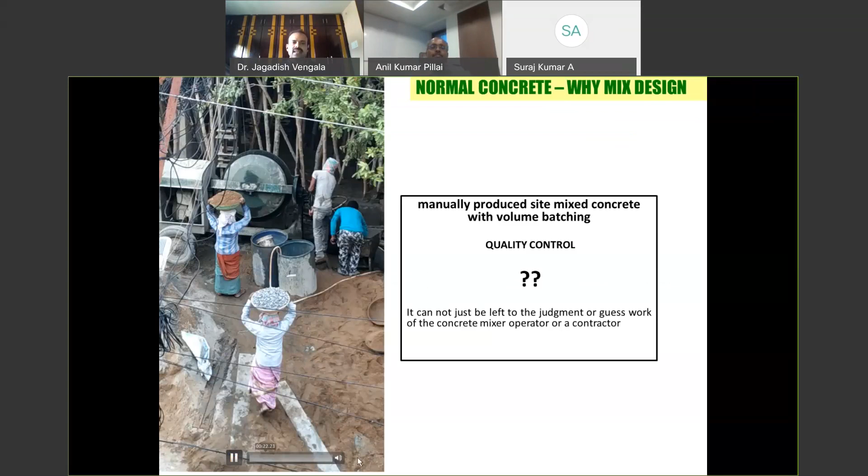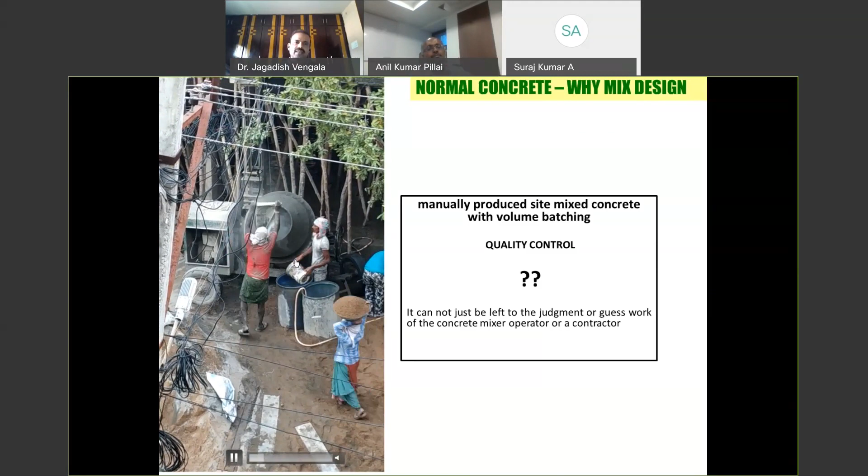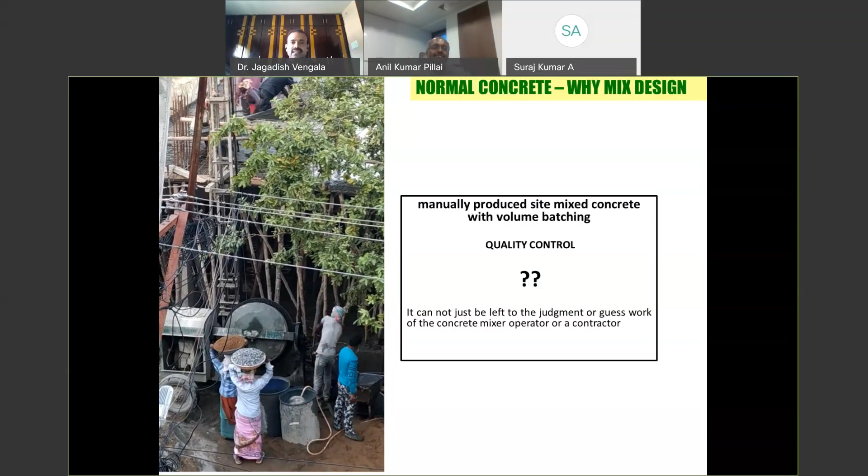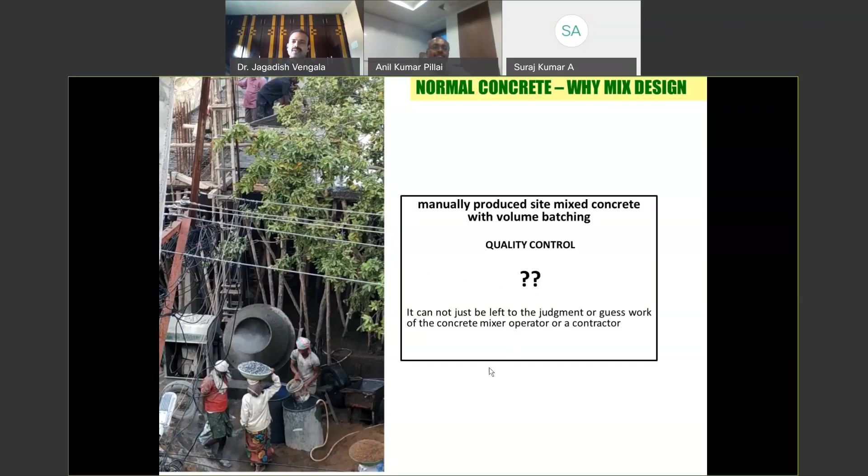I would like to play one video showing why we have to go for mix design. This is very important — I took this near my house, where they are mixing concrete. This is a general site, what you see near any building construction. People are putting whatever amount, approximately whatever the mix operator says. This mix operator put some water, then went somewhere and is just coming back. Meanwhile, a lady is putting coarse aggregate and a boy is putting water again. One strange thing I want to mention: as soon as she puts in the coarse aggregate, the boy immediately turns on the mixer and places the concrete. This is the kind of quality control we often foresee in many small construction sites, because if the quality control engineer isn't taking care, these are the things that happen.

What happens when you do volume batching? You simply place it and do it — there's no mix design, just putting it in. You end up with a lot of complications, because any specific variable changed in the concrete can adversely affect certain desired properties. This is what happens.

What is our aim in concrete mix proportioning? You have to optimize different conflicting requirements — satisfy workability, strength, durability, and cost at the same time — and apply sound technical principles governing different mix proportioning procedures. All these procedures are just guidelines.

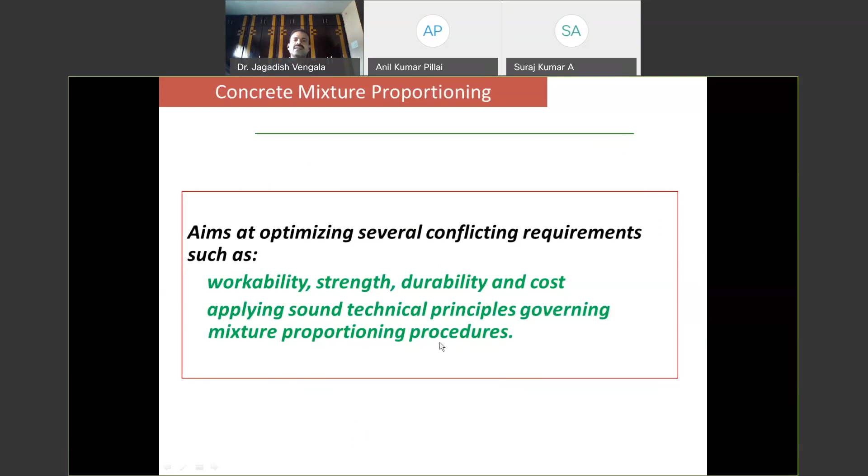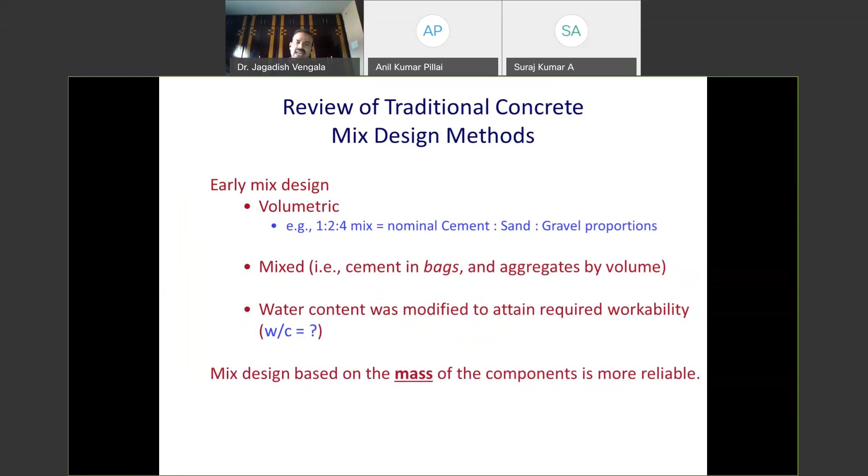As I mentioned, in volume batching many people go for a 1:2:4 ratio — it's a traditional kind of mix design, where water content is modified to get the workability. But most of the time you actually have to do it based on mass. Why? I'll tell you — there's a small but very interesting piece of work on the difference between volume batching and weight batching. You can see here a 20 mm maximum size aggregate, approximately 19 mm aggregate.

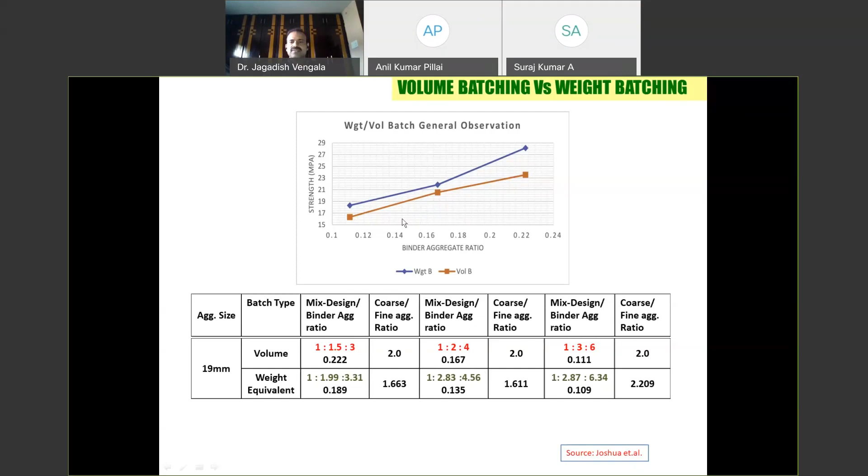See, volume batching, different mixes: 1:1.5:3, 1:2:4, 1:3:6, what we are talking about. Suppose you convert that into weight equivalents, you can see the difference in strength between weight batching and volume batching. You always end up getting more strength with weight batching. This is a good example where all the volume batching mixes give you a binder to aggregate ratio that is more, and then with weight batching you end up getting a good result. That is the importance of weight batching. Just wanted to give some example.

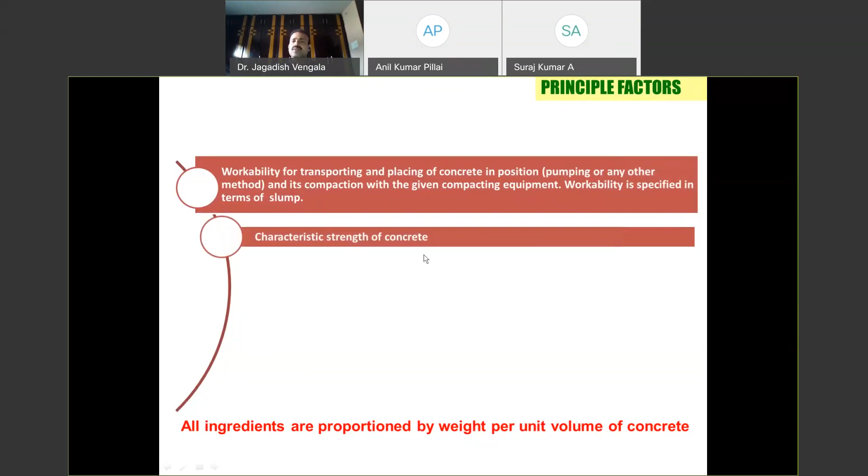What are the principal factors that govern any concrete mix design? The first is workability. Once you make the concrete, you have to properly transport and place the concrete in position, and you have to maintain the workability till then. You measure the workability using the regular slump cone method. Strength of the concrete is also one of the principal governing factors in designing the mix.

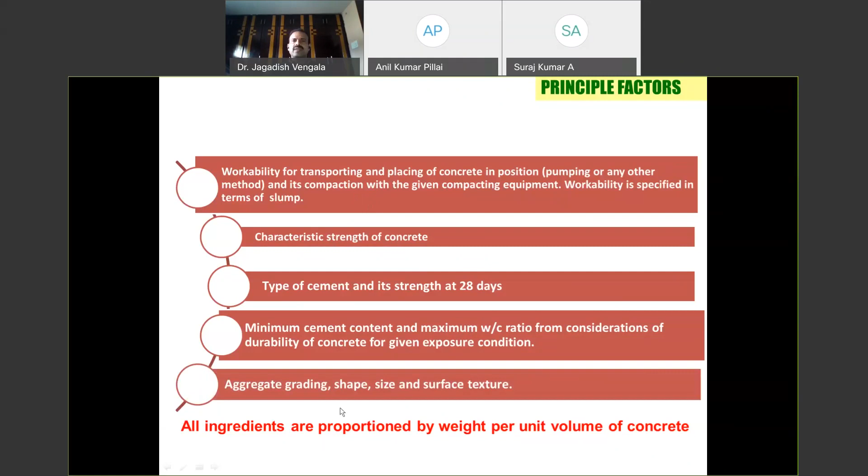What type of cement you are using and what is the strength in 28 days is also important. IS 456 gives you the minimum cement content and maximum water cement ratio you have to use, based on durability considerations. So exposure conditions are very important, starting from mild, moderate, severe to very severe and extreme conditions. IS has given quite good guidelines. But all ingredients, whatever you proportion, you have to go by weight per unit volume of the concrete. Also aggregate grading, shape, size, and surface texture is important. These are the principal factors governing mix design.

What are the objectives of concrete mix design? One, it has to meet the strength requirements and fulfill the durability requirements, wherever the structure is in that particular environment, and it can be mixed, transported, and compacted without any problem. At the end of placing, you should have satisfactory appearance to the mix, and as far as possible it should be economical.

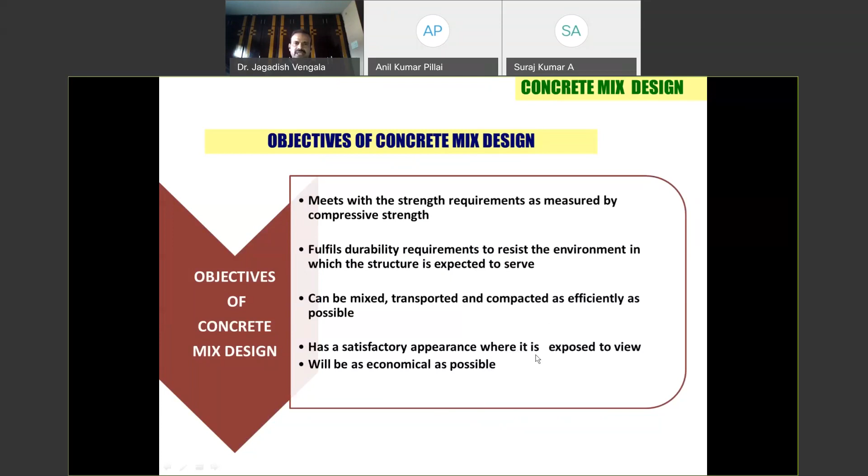So how do you go ahead with the concrete mix design? First, we follow some guidelines based on past experience, published data, information obtained from properties. We conduct small scale trials in the laboratory and testing, and then we also conduct full scale trials before construction begins at the site. Then we go ahead with the actual concreting.

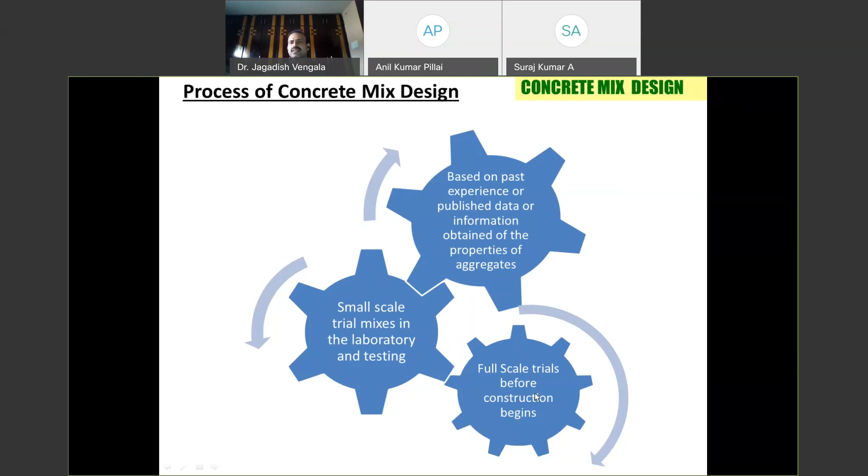If a particular normal weather condition, for a small structure, if some elements like columns and beams are going for M20 grade of concrete, say that is mild condition, particularly if it is RCC, you cannot go for M20 grade for the same weather condition for footings, because footings come under a condition where they are buried under aggressive soil. So you have to consider that as moderate exposure.

When I was doing this, last 20 years back, there was always confusion among contractors. We strictly recommend that whatever the normal weather may be, one has to go for moderate exposure for footings. So the minimum grade of concrete for it is M25 grade. That is why a lot of importance is given to the exposure condition.

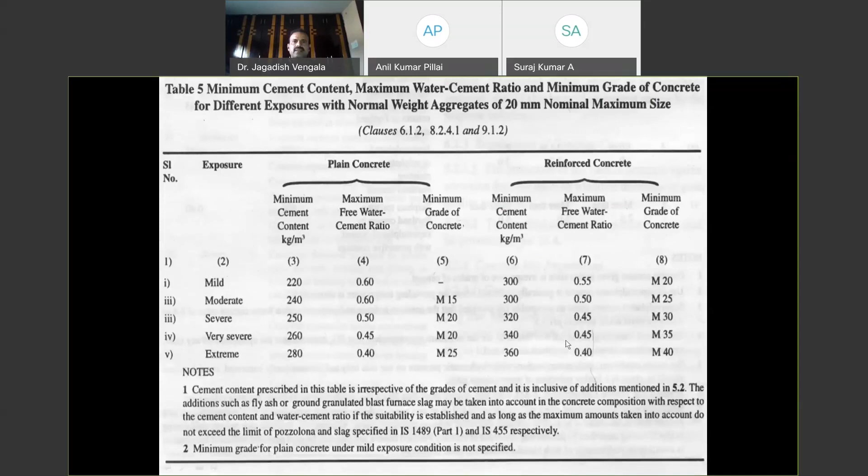So when you look into this table, for RCC, cement content starts with 300 kg per cubic meter of concrete up to 450 kg per cubic meter, and the maximum water cement ratio for RCC starts at 0.55. The grade of concrete classification is now changed - ordinary, then standard concrete, and high strength concrete, because IS 10262:2019 has given different strengths of concrete, and Indian standard also permits you to use various mineral and chemical admixtures.

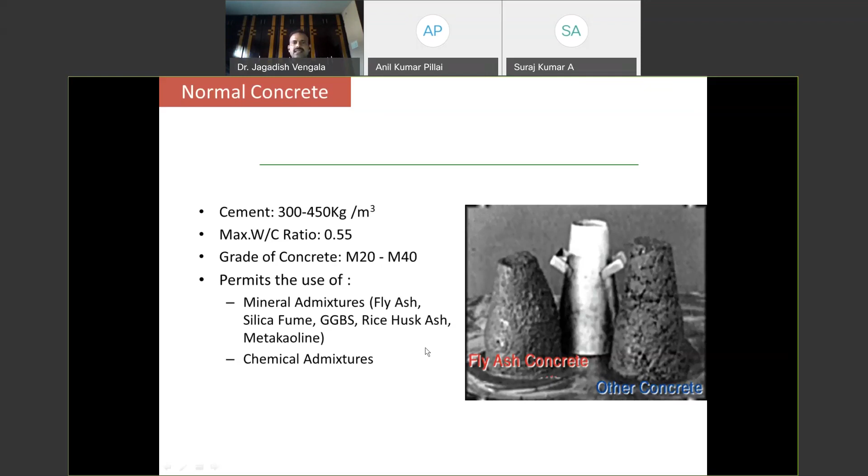When you want increased slump, you add a super plasticizer and get the required slump without changing the strength. Suppose the requirement is strength - you have not altered the slump, and the water-cement ratio is reduced, and you get the required strength by incorporating the super plasticizer.

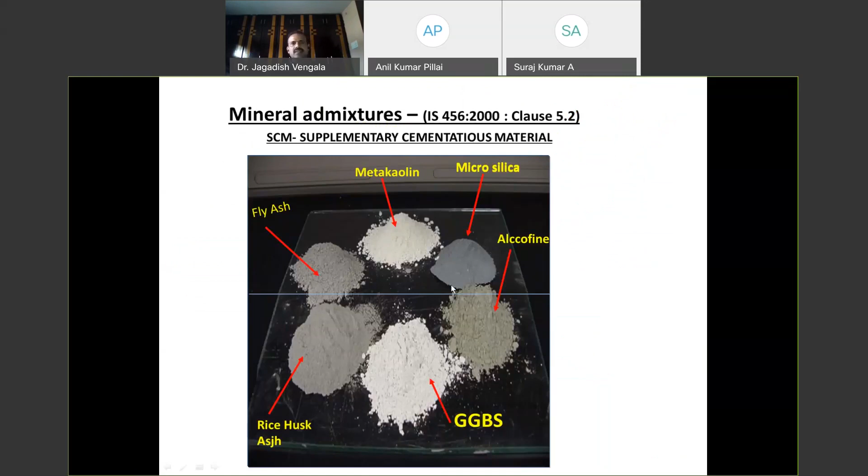The basic reaction, when you add water to cement, basic hydration happens and calcium silicate hydrates form. When you add supplementary cementitious materials like fly ash or GGBS, the excess calcium hydroxide reacts with these materials and forms additional CSH gels, which contributes to more strength, and the concrete becomes denser.

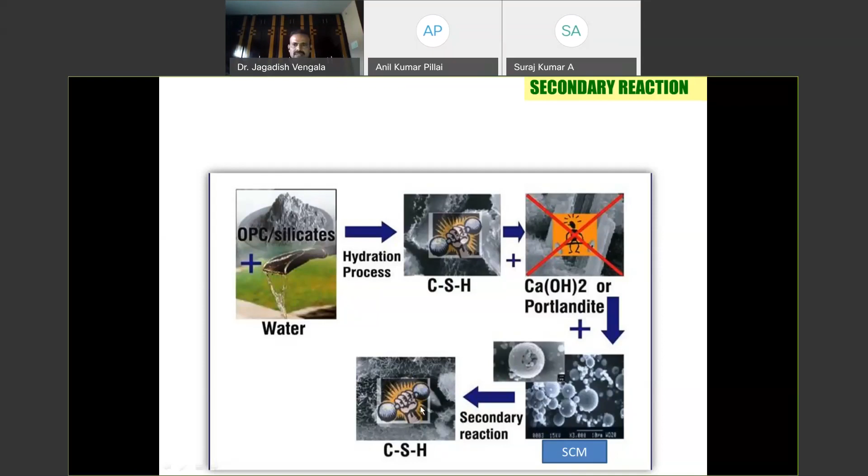That's the basic hydration process. When you add pozzolans, it improves the strength and at the same time increases the impermeability. Also, adding pozzolans reduces the bleed pockets because additional CSH gels form, and you get increased compressive and tensile strengths in concrete.

Particularly when looking at the aggregates used in concrete, this is very important. Earlier, jaw crusher aggregates were flaky and elongated in nature. Nowadays VSI crushers, vertical shaft impact crushers, have come, giving you nice angular cubical shaped aggregates.

You also have to look into the type of aggregate and where you are sourcing it. When we were doing mix designs with aggregates procured from Chennai and Tamil Nadu, we used to get specific gravity of 3.1, 3.2 sometimes, whereas regular aggregates are around 2.65, 2.67. So if you don't go for the mix design, you end up getting problems when you go for volume batching.

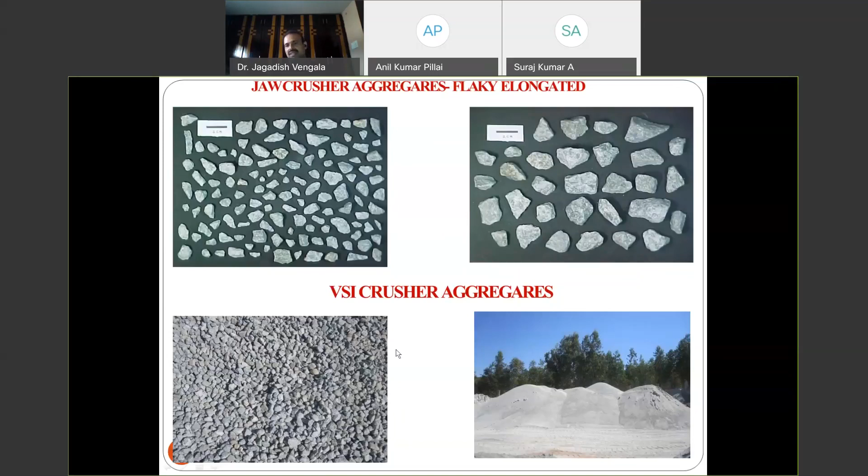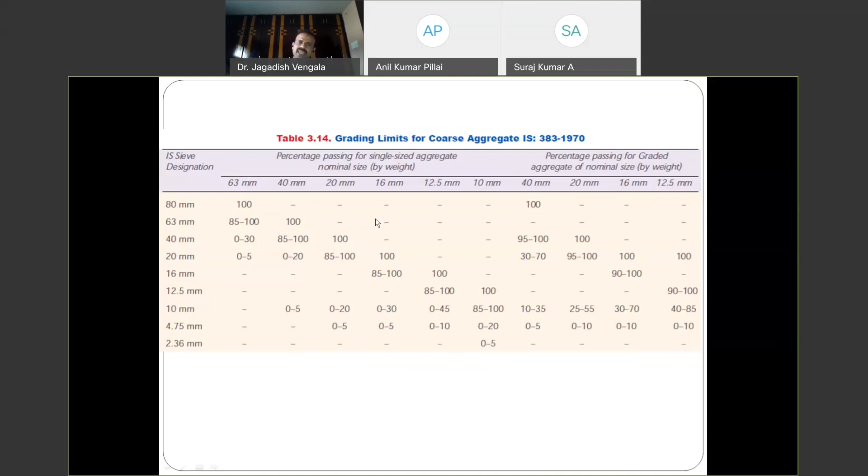It is very important to see that all the aggregates are graded in nature. Most of the time when you source both 20mm and 12.5mm down aggregates, these fall into single-sized aggregates. So most of the time, to make it a graded aggregate, we have to add different percentages - most common is 50-50, or sometimes depending on grading, 60-40, 40-60. We adopt this at various sites depending upon the aggregate properties.

It is very important whenever we do the mix design that we keep SSD condition, saturated surface dry condition. But at site, either the aggregates may be air dried or the aggregates may be wet. So you have to adopt moisture corrections, water absorption corrections. If it is air dry, if it is surface wet, or if it is completely saturated aggregates, you have to apply corrections for both cases - moisture correction and water absorption corrections.

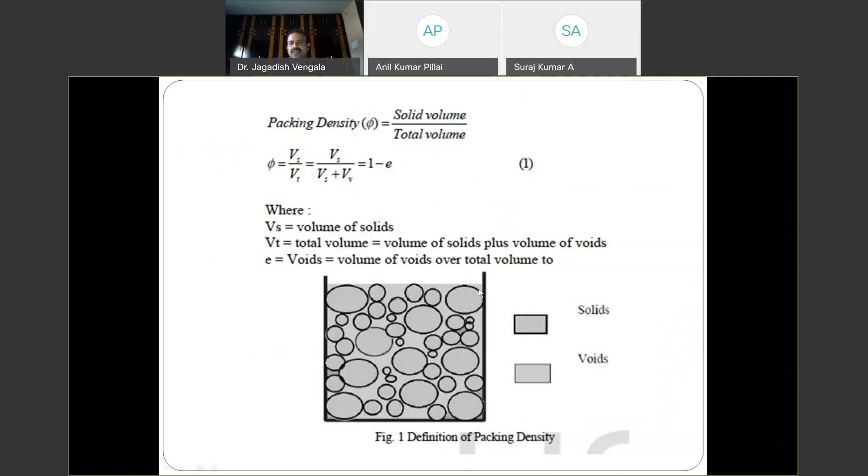This is what I'm talking about - the mix design basic concept is to have more packing density to reduce voids in the mix. So you can use this particular method to get the lowest void content.

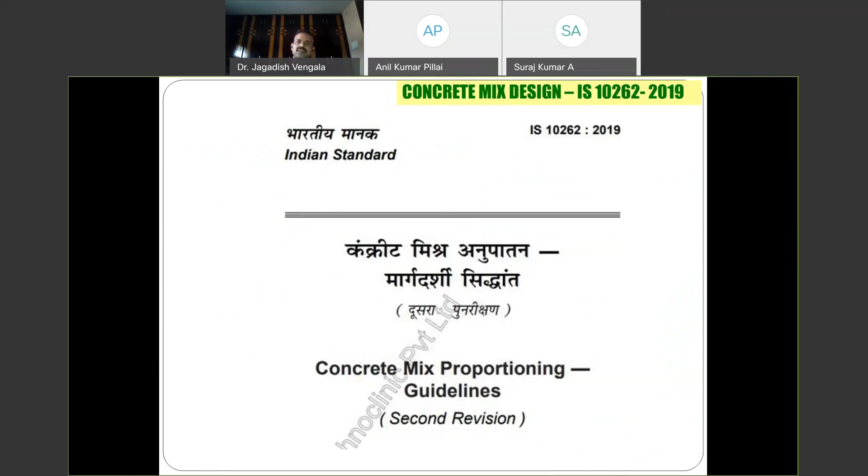Coming to the mix design, through an example I'm going to give you some insights into mix design - concrete mix proportioning, the new IS code 10262:2019.

Some of the highlights are, you can design different mixes. Ordinary concrete starts with M10 to M20, and standard grades are given between M25 to M55 grade. High strength concretes were mentioned in IS 10262, M60 to M100, and all sections are divided into general guidelines - ordinary and standard grades of concrete in the second section, high strength concrete given next, then self-compacting concrete in another section, and mass concrete in another section.

Somebody is saying the audio is not clear. I hope somebody can tell me if the audio is fine or not. It is clear, sir, it is clear. Thank you, it's very clear. Maybe at the attendee's end they would not be having the required bandwidth. Okay sir, thank you, we are able to hear you perfectly. Yeah sure, thank you sir.

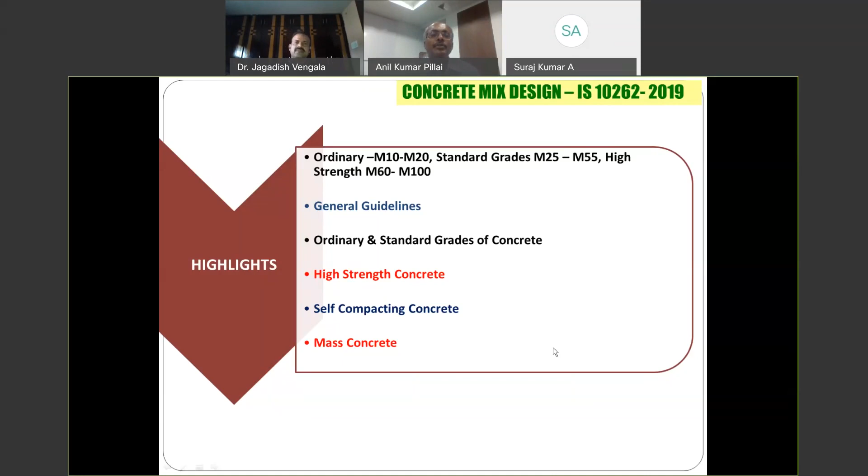Continuing - so when you go for the mix design, you look into the workability perspective. IS 456 has given different conditions, different slump requirements. You can see it is there - we all know that.

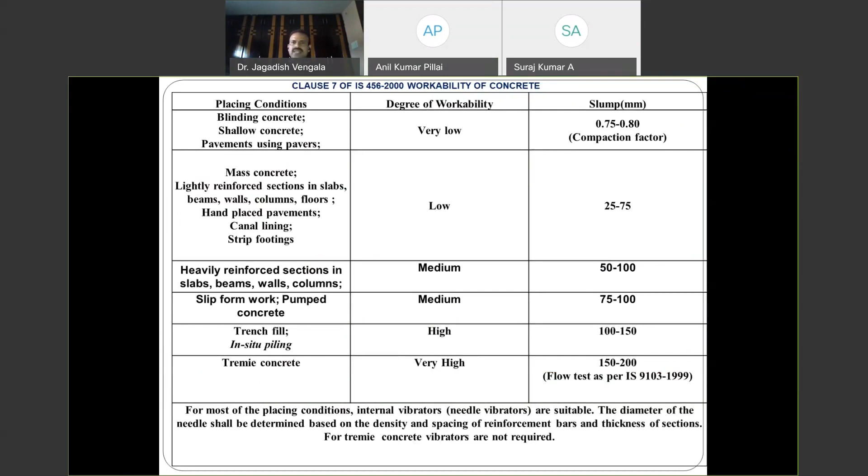Mixing is also very important. The minimum mixing time should be at least 2 minutes minimum. So people have to follow it.

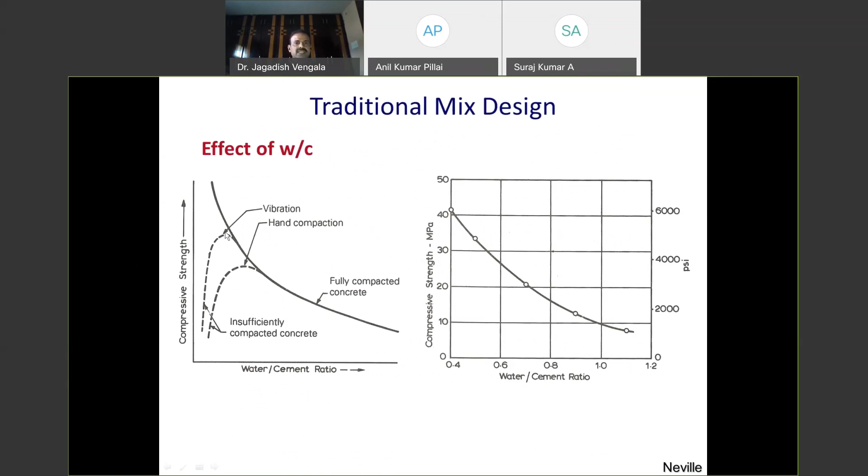And very important, one is water cement ratio to compressive strength. We all know the Abrams' law, but if you don't compact properly, you can see the relation between water cement ratio to compressive strength. If it is fully compacted concrete, how the compressive strength is, if hand compaction happens, how it is, and vibration - there are limitations for the traditional methods.

That is why you have to go for the mix design. So let me get into the example. Through this example, I'm going to explain each step.

So these are the details. M40 you've taken, OPC 43 grade. It conforms to IS 269. Fly ash is taken as admixture, mineral admixture, 20 mm.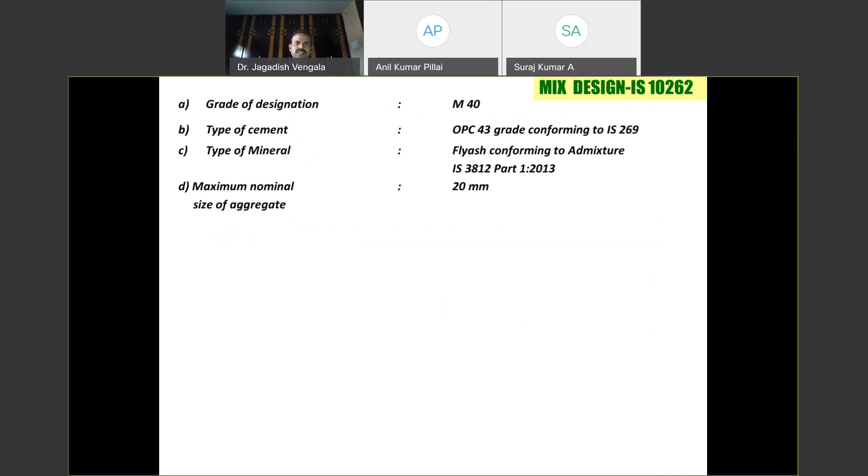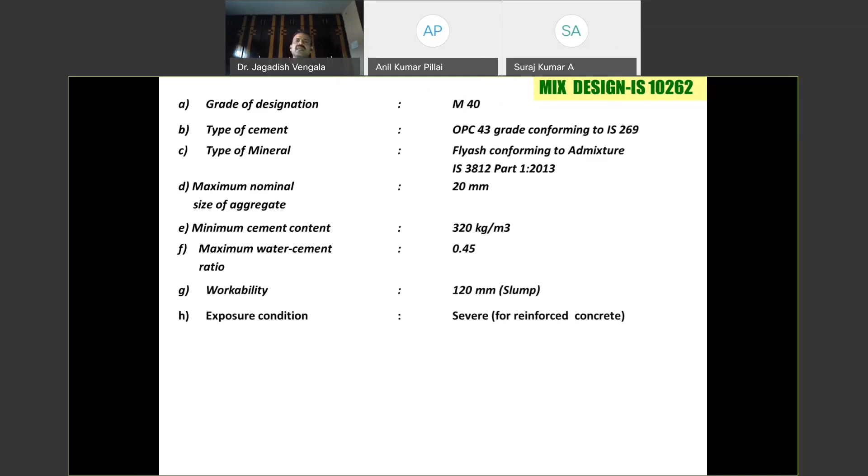And minimum cement requirements, these are the stipulated requirements given. Maximum water cement ratio is 0.45 because the condition is severe exposure condition. Workability requirement is 120 mm, that is slump, and you have to pump the concrete. And degree of supervision is good, and aggregate is crushed angular.

And maximum cement content - we all know that IS limits maximum cement content only, not cementitious content - cement content is 450 kg per cubic meter.

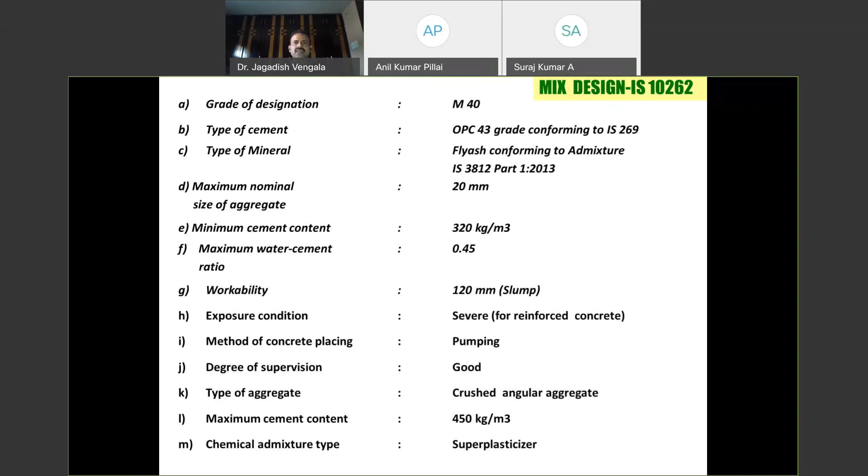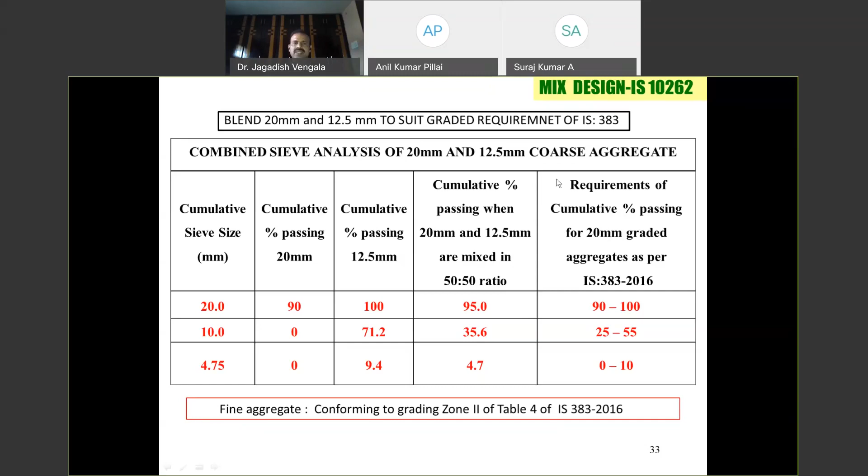So what you have to do is you have to blend both 20 and 12.5 to suit the graded requirements. And fine aggregate is conforming to zone 2.

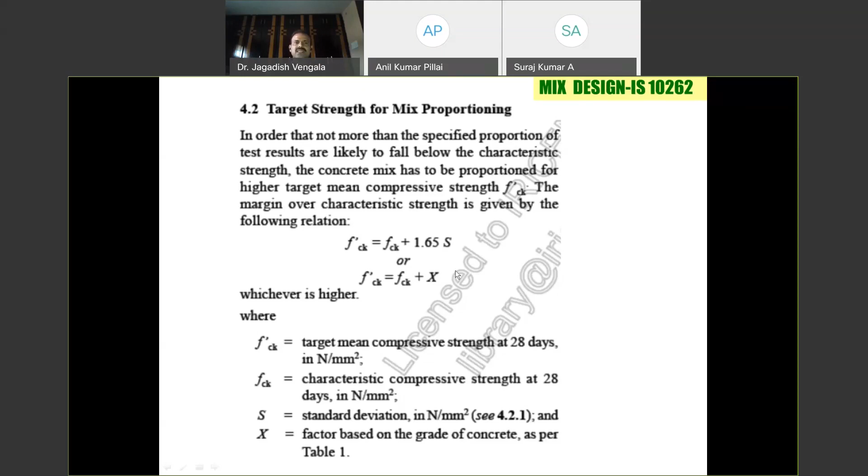So there is a little change in target strength formula when compared with the old code. Here they have given FCK plus 1.65 into S, that is the normal one. And then they've also given FCK plus X. This X factor is given based on the grade of concrete, or otherwise you can take the standard deviation. So there are two types of formulas given - whichever is higher you have to adopt.

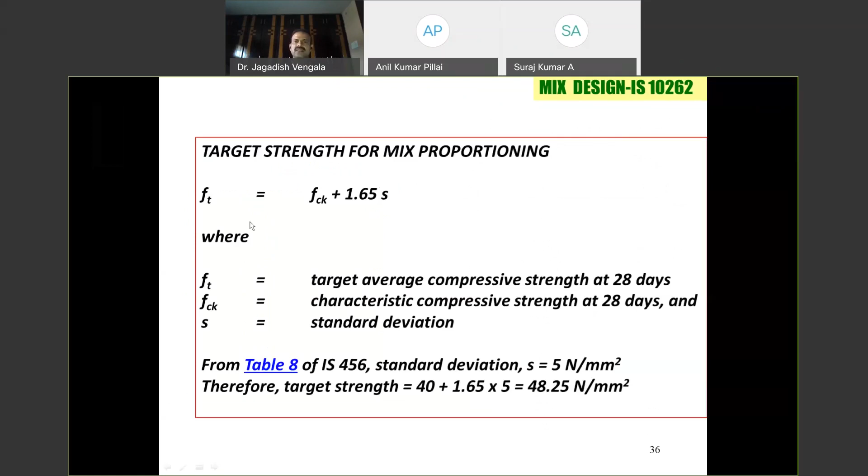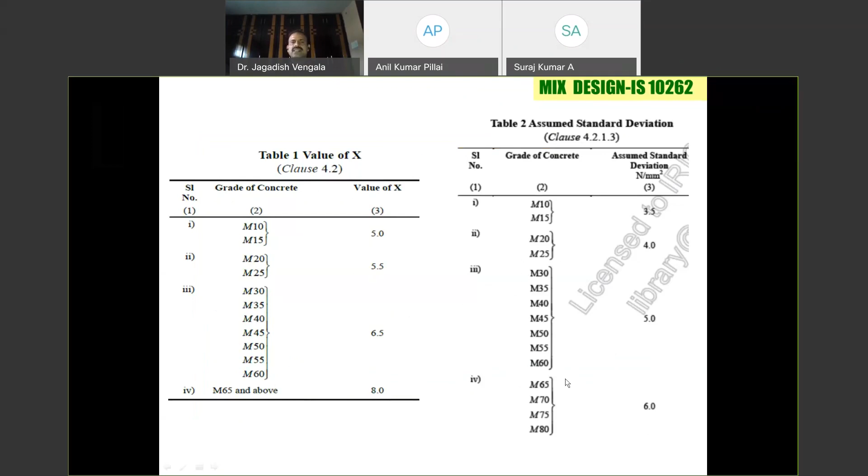So let us go step by step. First thing, standard deviation we have taken as 5 because it is M40 grade of concrete, and 40 plus 1.65 into 5, that is the target strength - you get 48.25.

And when you look into the exposure condition, the maximum water cement ratio is 0.45 as per durability requirement. So 0.36 is less than 0.45, hence it is okay. You can go with the required selected water cement ratio.

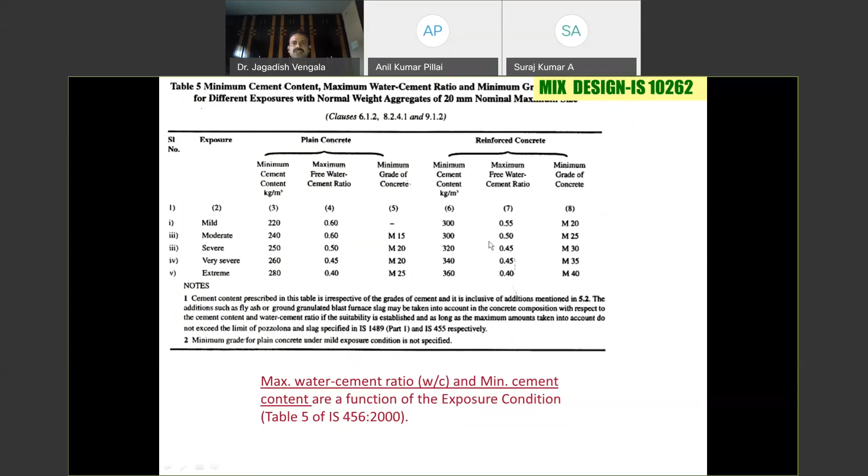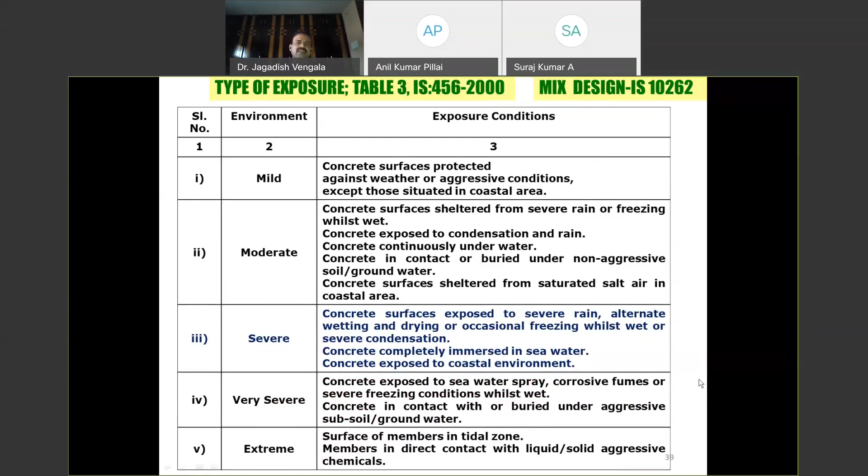I wanted to give you a refresh about the exposure condition, severe. The structure is either exposed to severe rain, or it is completely immersed in seawater, or it is simply in a coastal environment like Chennai, Mangalore, or Visakhapatnam.

Next step is selection of water content, based on the water content table. For 20 mm, it is 186. When the nominal maximum aggregate size is less, say 10 mm, the water content requirement is more because you have more surface area in coarse aggregates. If it's 40 mm maximum coarse aggregate, the surface area becomes less, so you need less water. We have taken 186 because the maximum coarse aggregate size is 20 mm.

Slump requirement is 25 to 50 mm slump, for which this 186 liters is given. For every 25 mm slump, you have to go for an additional 3% of water. In case of 120 mm slump, you make that correction. Also, since it is pumpable, you have to reduce coarse aggregate by 10% - I'll come to that later. As far as water is concerned, because the slump is 120, you have to additionally add 3% for every 25 mm.

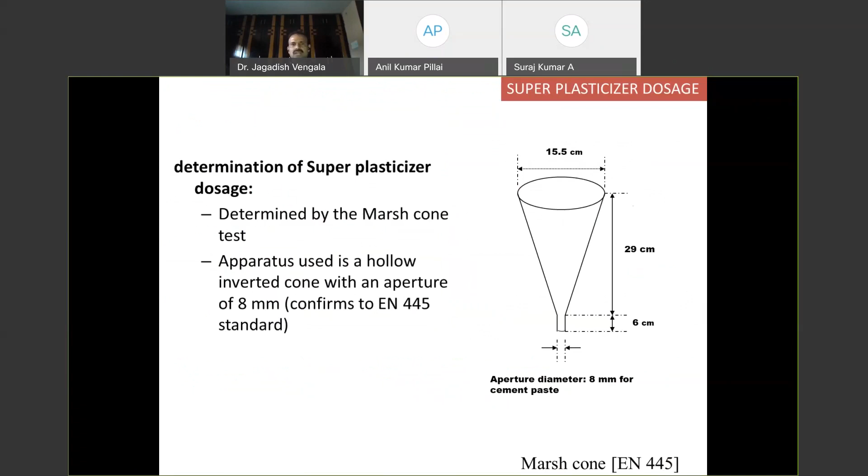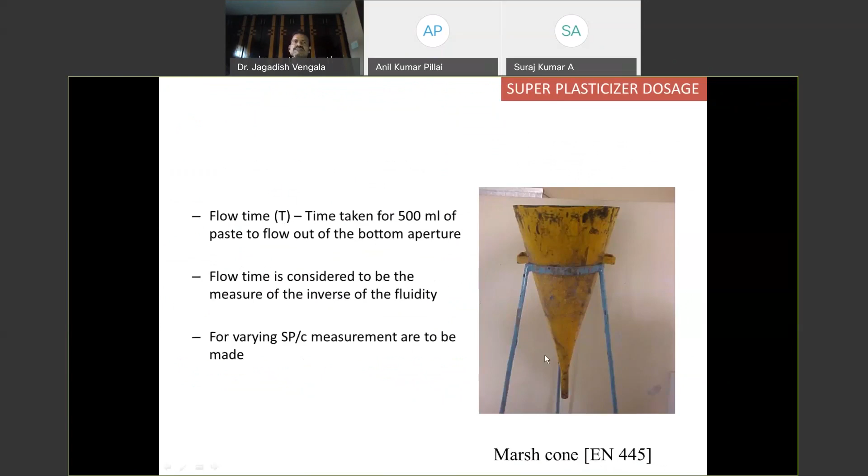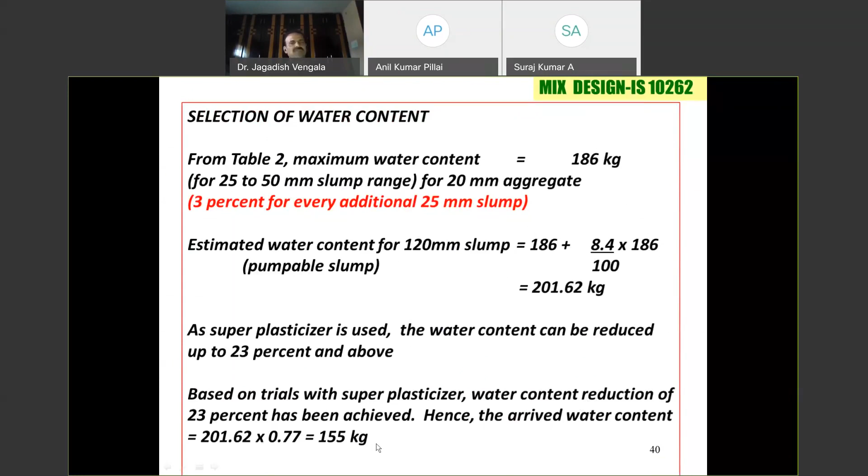Superplasticizer dosage and compatibility between cement and superplasticizer can be taken from the marsh cone test. Coming back, once you add the required superplasticizer dosage based on trials, the water content - this achieved a water content reduction of 23%. So the rest is 77% of the water, which is 155 kgs or liters of water.

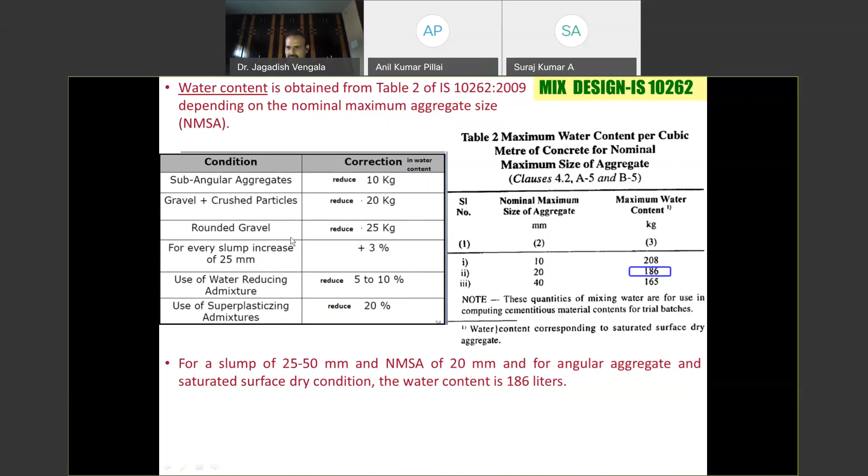Suppose you have different kinds of aggregates - if you have rounded coarse aggregate, you have to reduce the water content by 25 kgs, and if it's subangular aggregate, you reduce it by 10 kgs. You have to adopt depending upon the material property. Many times, once the source of material changes, people follow the same mix design given from the lab. You have to make corrections and fine tune the mix design, conduct a small trial at the site, and then go ahead.

Once you have the water-cement ratio and water content, water by cement equal to 0.36, you get the cement content - here it is 431 kgs. For severe condition durability requirement, per the table, the minimum cement content is 320 kgs. Since 430 is much higher than 320 kgs, the durability consideration is satisfied.

But keep in mind, if the coarse aggregate size changes - suppose you go for 10 mm down or 12 mm down - then you have to take minimum cement content as 320 plus 40, that is 360 kgs, as the minimum requirement for the 10 mm down size aggregate under severe condition. That means the minimum cement content has to be increased. The maximum cement content we all know is 450 kg per cubic meter; you should not go beyond that, because beyond it there is a risk of cracking.

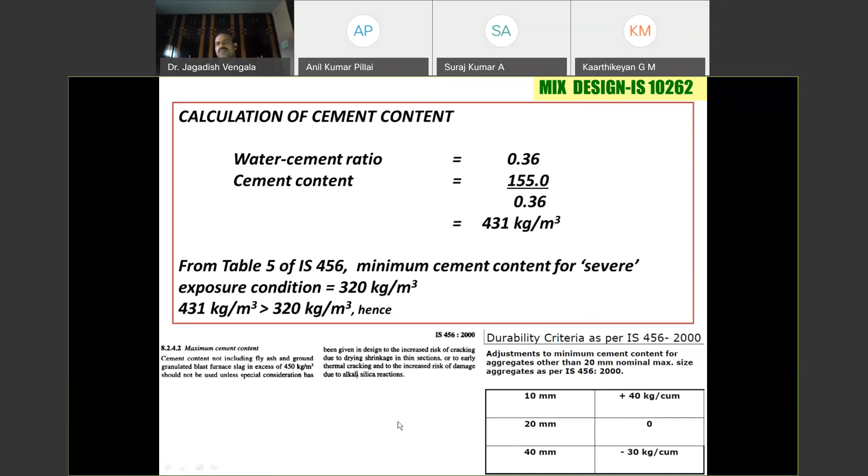Get the cementitious content, then you have to proportion the mix for the fly ash. How do you decide the percentage? You have to decide based on the project, because of whatever you have agreed with the contractor, the client, or the third party. And in certain situations, you have to increase the cementitious materials based on experience. So you have to adopt based on experience and trial, or based on the project.

But anyway, for high strength concrete, the limits are now given in IS 10262:2019. I will show you what the limits are. So it's a simple example. Suppose a 10% increase you have to do. Already 431 is your cementitious material, with a 10% increase, then it is 474.

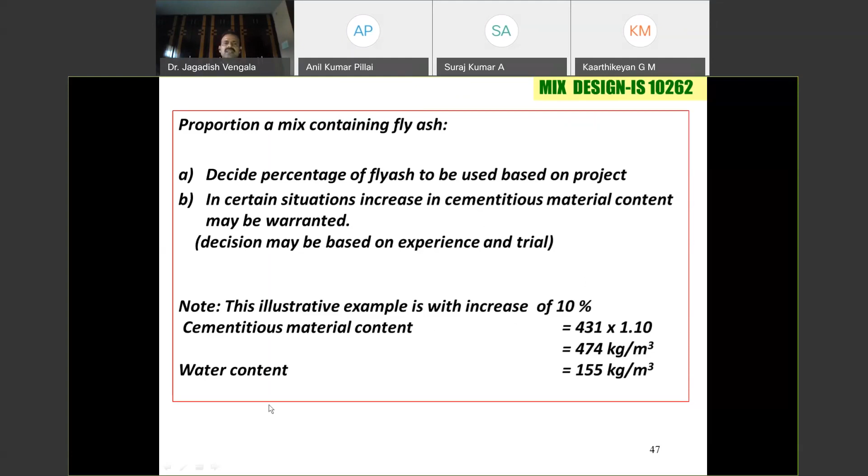Then what is the water content? 155 kg per cubic meter. So how much is your water cement ratio? 0.327. Okay. So once you get that, adopt fly ash for this particular mix at 30%. So 474 into 30%, you get 142 kgs as the fly ash, and you deduct 142 kgs from the cementitious content, and then you get the cement. So cement is 332 and your fly ash is 142.

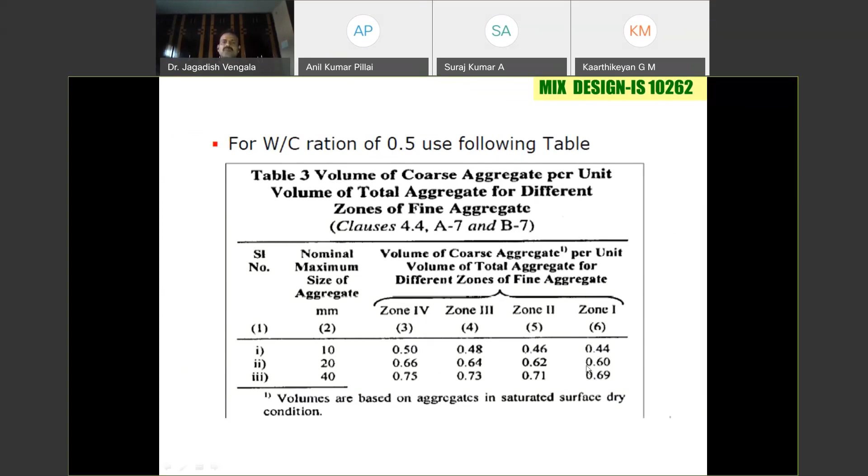So next, once you have your water, cement, and fly ash, you have to go for the coarse aggregate proportions. You know that for zone 1, 20 mm aggregate, it is 0.6. And when the zone increases, that means as the fine aggregate zone increases, your coarse aggregate volume increases. So here, because it is a 20 mm downsize and zone 2 sand, for water cement ratio 0.5, you can see it is 0.62. That's from the table. And in our present case, the water cement ratio is 0.327. So you have to adopt corrections.

It is very simple. If the water cement ratio changes, for every 0.05 increase, you have to reduce the volume by 0.01. If you are reducing the water cement ratio from 0.5 to below, here in this case 0.327, then for every 0.05 decrease, you have to increase the volume of coarse aggregate by 0.01. So here at 0.327, you get 0.62 for 0.5, right? So additionally you have to add, because the water cement ratio is reduced. So 0.0346, and the total volume of coarse aggregate ratio you get is 0.654.

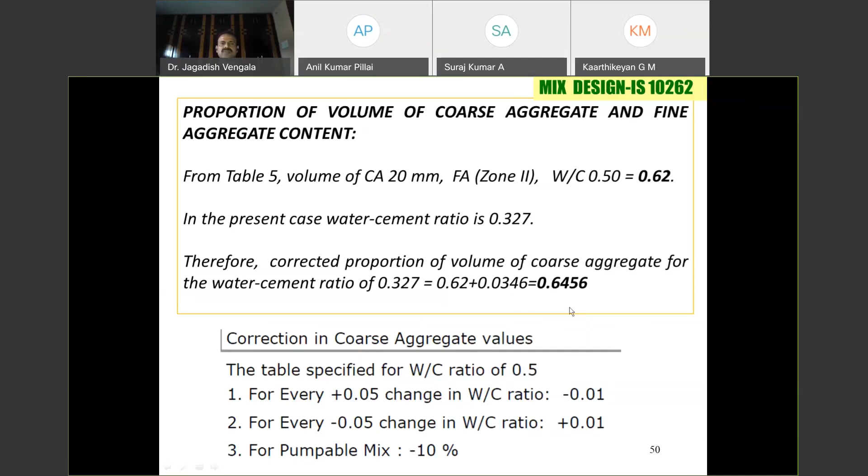So in this case, again, this is a pumpable mix. So for a pumpable mix, you have to reduce the coarse aggregate volume by 10% because you need more paste to push the aggregates while pumping. So that is the reason we have to reduce it by 10%. So the volume of coarse aggregate is 0.654 into 90%. That means 10% you are reducing. Finally, your volume of coarse aggregate is 0.59. So if you deduct from the total volume, it's 1 minus 0.59, which is 0.41.

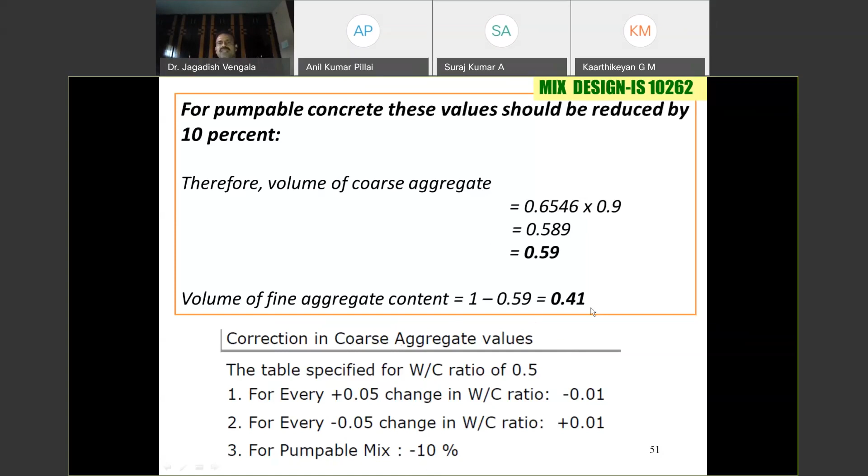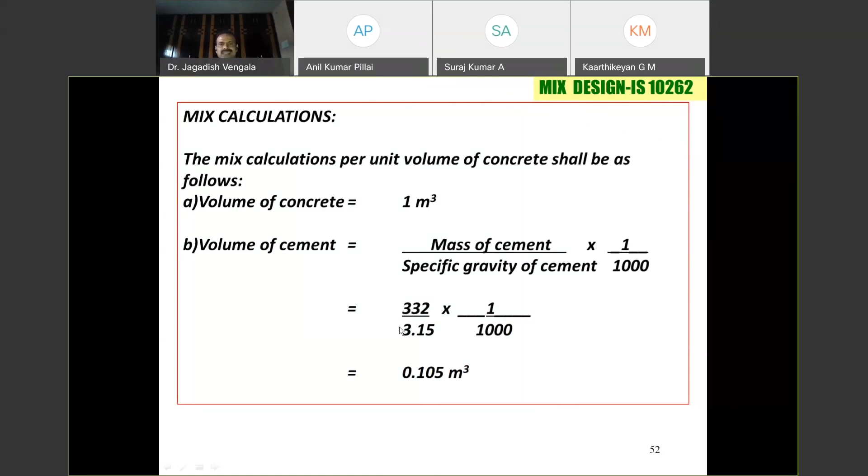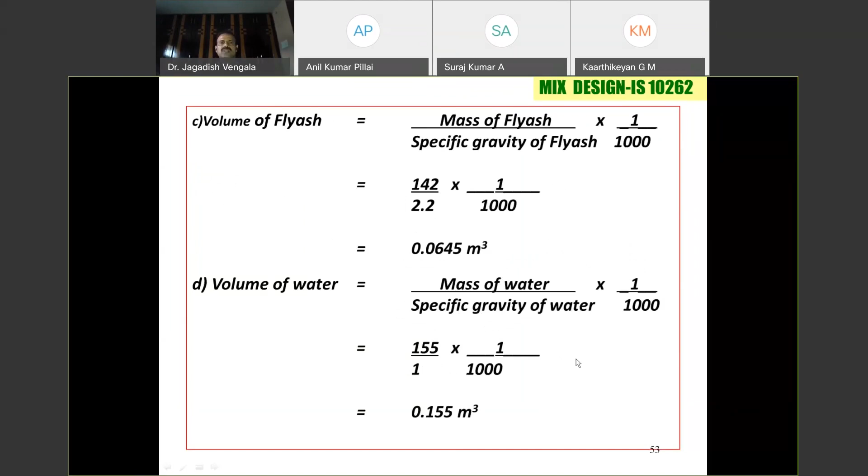So you know the basic calculation. You have to take the volume of concrete, 1 cubic meter you are doing, and the mass of cement, which you got as 332, divided by specific gravity into 1 by 1000, you get the volume of cement. And the specific gravity of fly ash in this case is 2.2, 142 is your fly ash, and then into 1 by 1000 you get the volume of fly ash. And water, 155, you get the water volume. And then you also have to calculate the volume of chemical admixture. Here in this case, we are using 1% by mass of cementitious material. The specific gravity of superplasticizer is 1.145. So you get 4.74 liters per cubic meter. You get the volume.

And then you have to deduct from the all-in volume. Here in this case, we have got the air content in IS 10262:2019. So for 20 mm, the air content you have to take is 1%. If it is 10 mm aggregate, it is 1.5. Here in our case it is 1%. So that means 1 minus 0.01 minus the rest of the cases. That means you have deducted the cement, fly ash, water, and superplasticizer. So you get the volume of all-in aggregates.

When you multiply with the specific gravity and the volume of coarse aggregate, you get the mass of coarse aggregate, and then you get the fine aggregate when you multiply with the remaining fine aggregate volume. So once you get the mixes, these are the final mixes you got: cement, fly ash, water, fine aggregate, coarse aggregate. This is for saturated surface dry conditions. So if you are at site and you have moisture or water absorption, you have to adapt that by checking the properties of the aggregates or materials.

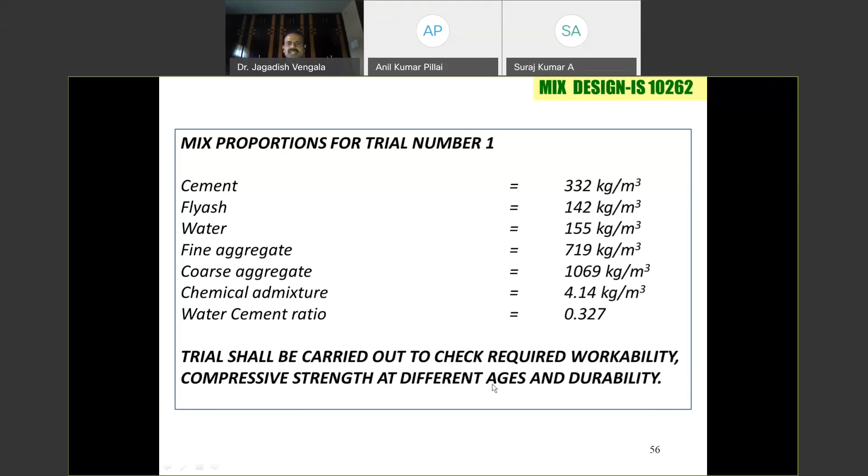So once you get the first trial, you have to carry out a number of trials and check the required workability, strength at different ages, and durability tests. For high strength concrete particularly, nowadays they are referring to durability tests also for tall structures. And here you can see two more. You have to conduct a number of trials with plus or minus 10% variation if you don't get the required strength.

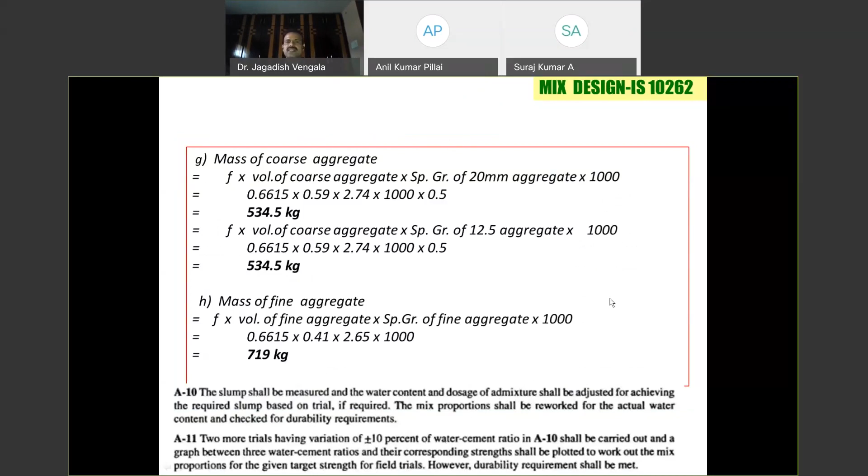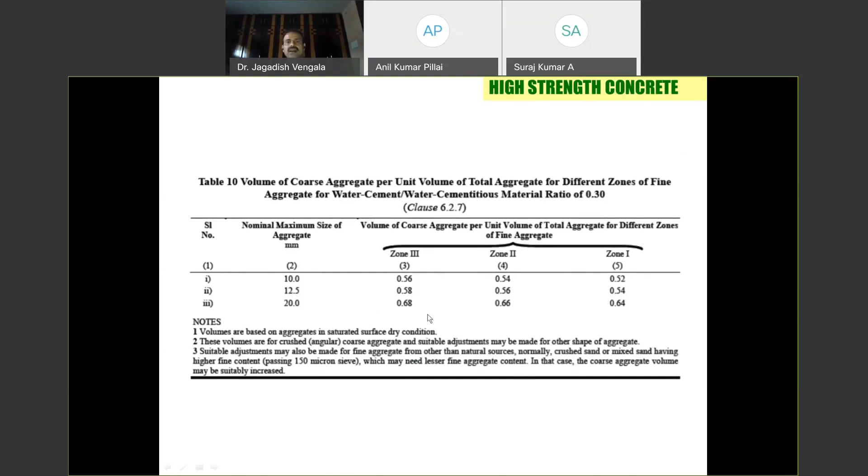Anyway, some points I would like to give you in case of high strength concrete. For nominal maximum size of aggregate, the volume of aggregate will be changing, particularly for high strength concrete.

For high strength concrete, the water cementitious material ratio is also given in the code book. For example, for 70 MPa with 20 mm down aggregate, the water cementitious material ratio you can adopt is 0.33. This is the recommended water cement ratio given in the new code for high strength concrete.

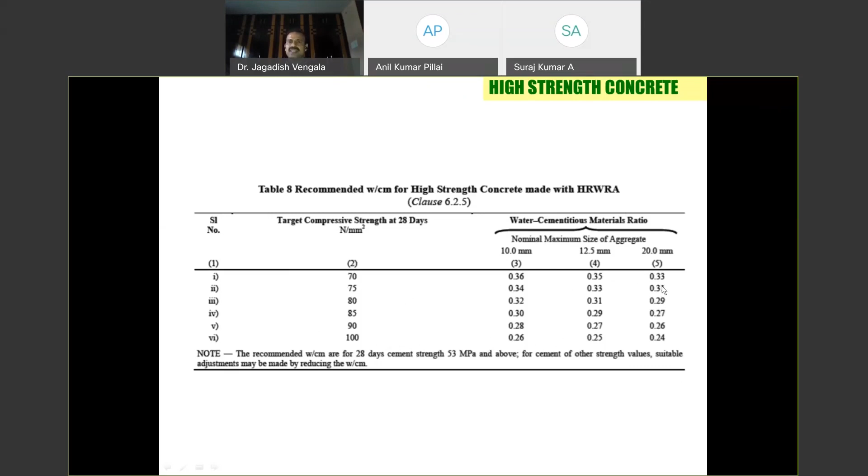Even the maximum water content is given based on the maximum size of the aggregates. For 20 mm it is 186, for 12.5 mm it is 195, and for 10 mm down it is 200. This is a little different when compared to IS 456, where water content is given for 10, 20, and 40 mm. But when going for high strength concrete, you use either 12, 12.5, 20 or 10 mm, and these are the maximum water content limits given.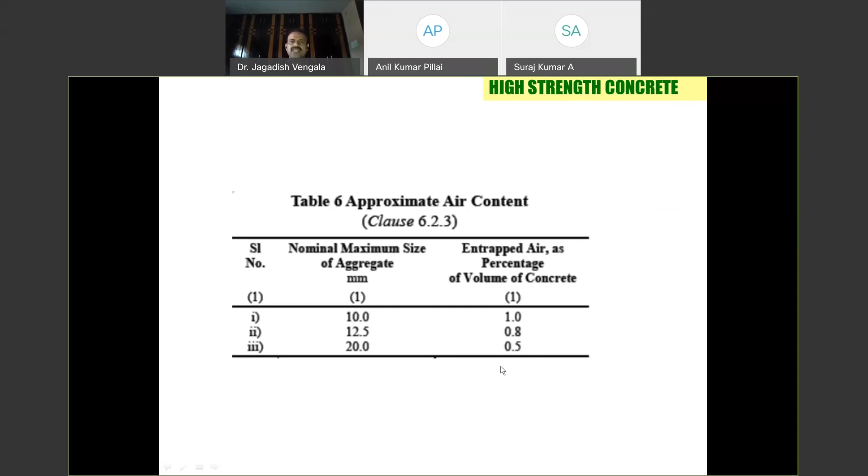Air content is also considerably reduced for high strength concrete. For 20 mm you have to adopt 0.5%, meaning the least voids you have to go for, particularly for high strength concrete. In normal concrete you have seen this is like 1%, but here it is 0.5%.

These are the recommended mineral admixture dosages given for high strength mixes in IS 10262. Fly ash can be adopted between 15 to 30%. Earlier, for Portland Pozzolana cement, the blend allowed was up to 35% while making the cement. Now the recommended dosage for direct addition of fly ash is given between 15 to 30%.

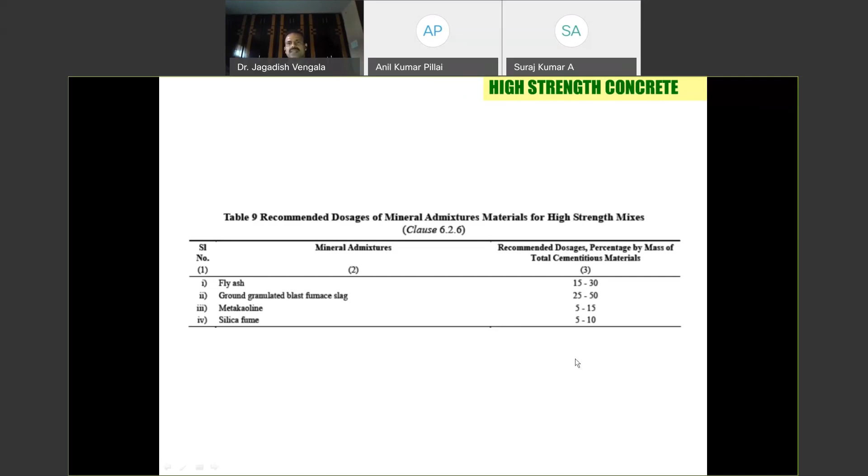GGBS can go up to 50%, that is between 25 to 50%. But in Portland slag cement, generally they go up to 60 to 65% replacement. Metakaolin is a fine powder, so you use very small quantities, between 5 to 15%. Silica fume is also 5 to 10%, given for high strength concretes.

Before ending, I wanted to mention that, working with my guide, we have worked on a lot of self-compacting concrete mixes over a period of time. Volume fractions are very, very important in mix design of self-compacting concrete. With a small example, I would like to end this presentation.

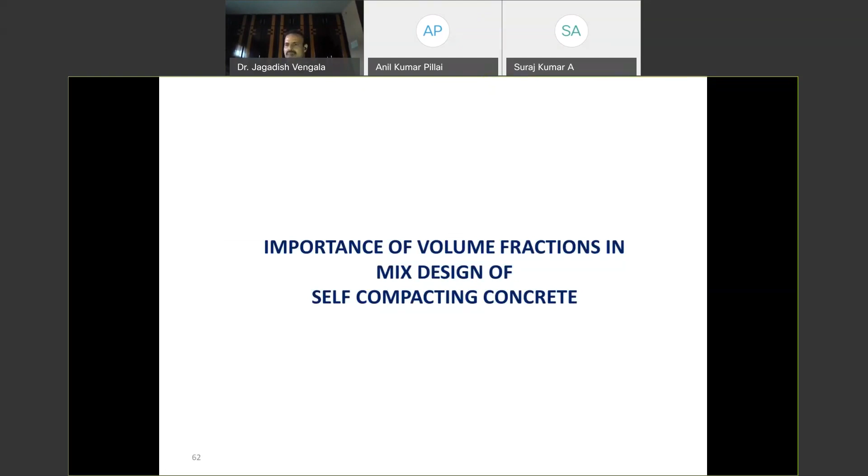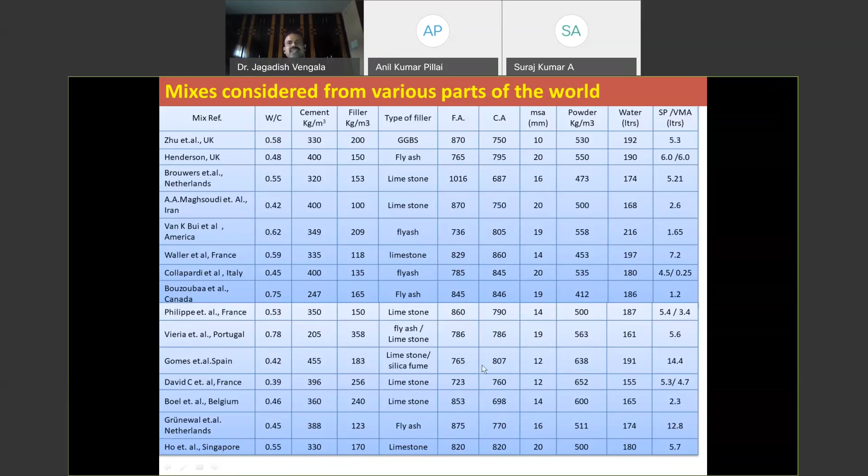Self-compacting concrete requires a higher cementitious content, between 450 to 600 kg per cubic meter. In these mixes, either the coarse aggregate and fine aggregate contents are equal, or sometimes coarse aggregate content is lower than fine aggregate content, because you need to keep the coarse aggregate in suspension. For this concrete, instead of vertical slump, you measure the horizontal spread. Looking at mixes from various parts of the world, the volume of paste varies between 0.35 to 0.41.

In normal concrete, the volume of paste comes around 0.21, roughly 21% to 23%. But in self-compacting concrete mixes, the volume of paste varies between 0.35 to 0.41, with a mean of 0.38. In case of Indian mixes, compared to mixes from other parts of the world, the paste content, volume of paste, varies between 0.37 to 0.46.

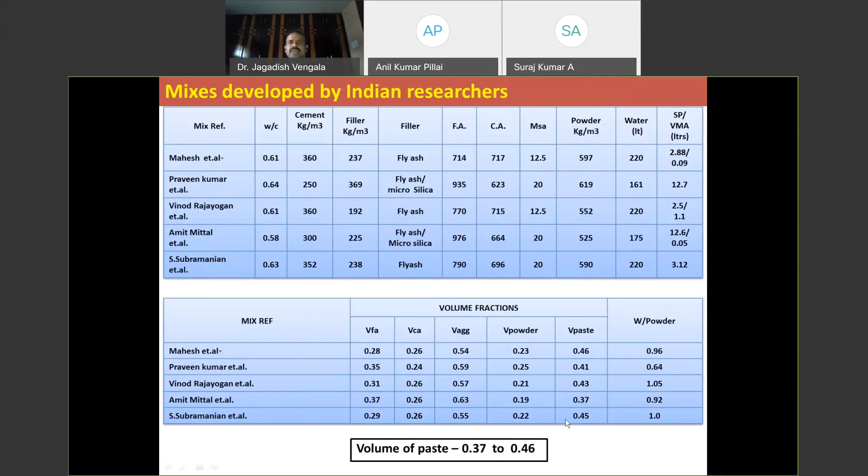This is because in the Indian scenario, you need more volume of paste due to inconsistency in coarse aggregate grading, and we get more flaky and elongated particles in the mix. So you require more paste volume due to that, and also if you want to avoid VMA, you have to go for higher paste. In summary, you require almost 40% paste particularly for SCC mixes, and the volume fraction of fine aggregate is almost equal to coarse aggregate.

But if you take a typical mix design of normal concrete, with approximately 700 to 800 of fine aggregate, coarse aggregate is almost like 1100 to 1200. So that means you get more coarse aggregate. But in case of SCC, you have equal or lesser coarse aggregate compared to fine aggregate.

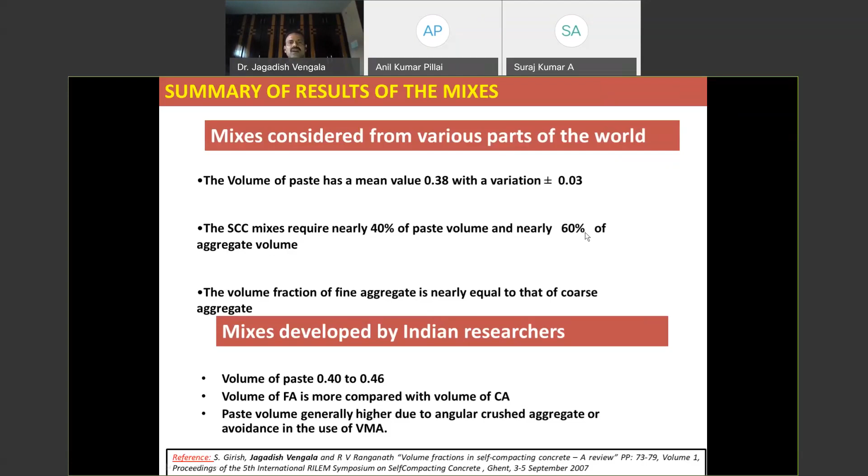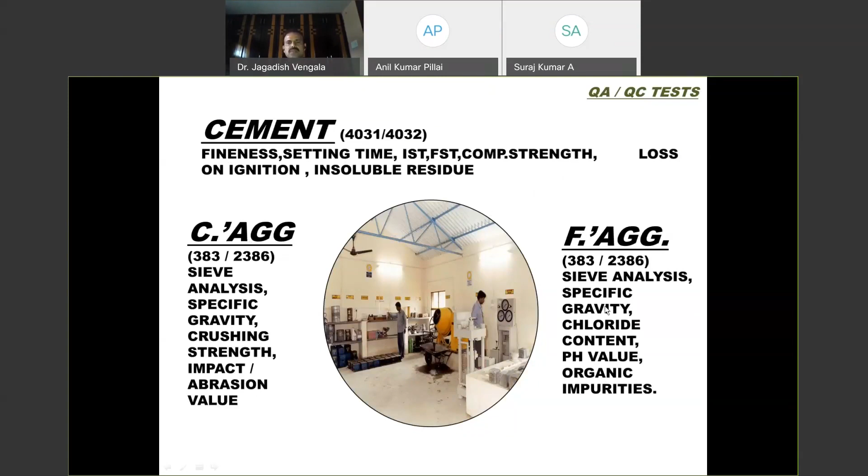At sites, you must go ahead whenever there is a change in content, wherein you have to conduct all these trials at site laboratories. For cement particularly, these are the tests you go ahead with, and for coarse aggregate, these are the tests you have to conduct. Where there is a change of source, again you have to fine-tune your mix design. It is very important to conduct tests for both water and admixture, because you don't want to take the risk of incorporating more sulfates or chlorides. So you have to check as per Indian standards, and you have to go ahead with the mix.

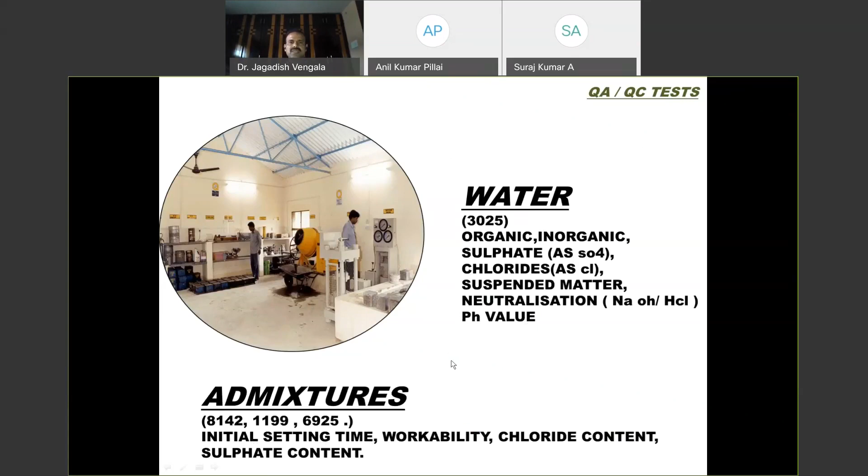So this is what I wanted to present with you. Thank you, Ramco, for giving me this opportunity. I have given some of the points I thought which are important, because it is only one hour duration. I wanted to give you an idea why mix design is required and how you go about the mix design with the new code, and also some of the compatibility issues, why the Marsh cone test is used, and these things I have mentioned during my lecture.

Okay, over to Anil, sir. Thank you so much, sir. It was a very interesting presentation. In fact, one of the points that you had mentioned was very apt and relevant.

Regarding exposure conditions, even if the structure is in mild exposure conditions, when we go for foundation, we need to adopt a minimum grade of concrete of M25, which normally is missed by many professionals. That's a very important point, because we classify the structure only at mild condition, but what about those that are buried under soil? Even though it is non-aggressive, we have to go for a minimum grade of M25. That is a very valid point that you have made. Yes, because we tend to miss that many a times.

One presenter was asking what is the maximum cement content for high strength concrete. Maximum cement content is limited to 450 kg.